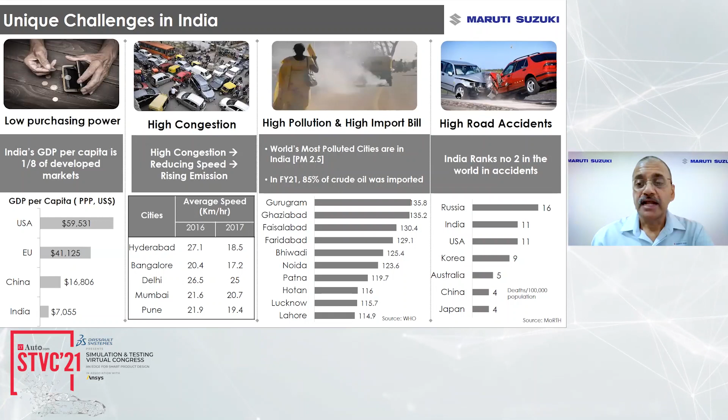This has led to reduced speeds, rising emissions. Pollution is still remaining high. The import bill is high because most of our crude oil is imported, and we continue to have high road accidents, and India is number 2 in the world.

But what is interesting and very different about India is that we have a very young population, and the Indian customer is evolving continuously. If you look at what they are looking for, there is an increased affinity towards modern technologies. They are always looking for intelligent features, whether it is on the smartphone or other gadgets or in passenger vehicles. They are always looking for enhanced safety. Safety has become very, very key for a buying decision. And of course, there is increased awareness in the current situation about health as well as hygiene.

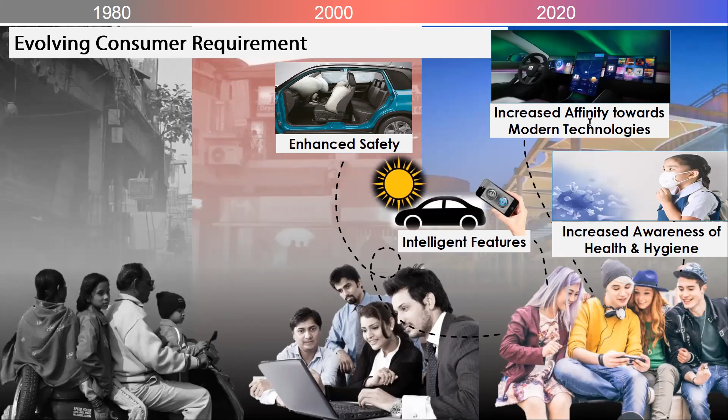The regulatory trends are also changing in a way that we are catching up with Europe. The emission norms of BS6 hit us in April 2020, and the auto industry moved in 3 years' time, in record time, to switch to BS6. The auto industry is working towards phase 2 in 2023, and CAFE phase 2, which is the current regulation. And of course, the future is WLTP and CAFE 3 going forward. These are some things we need to continuously work on.

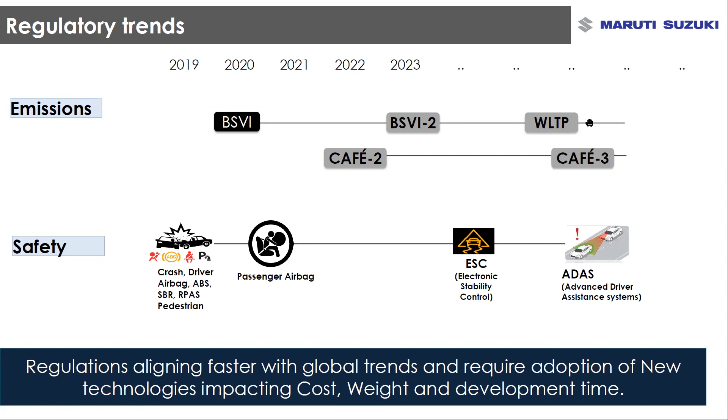Safety has become an important feature of the buy decision, and the regulation is at par with Europe today. So frontal offset impact, side impact, ABS being mandatory, passenger airbag has been made mandatory, and there are future regulations like ESC and advanced driver assistance systems being discussed, and we are globally aligning. This is forcing us to bring in new technologies, which is impacting cost and weight, and of course we need to do this development.

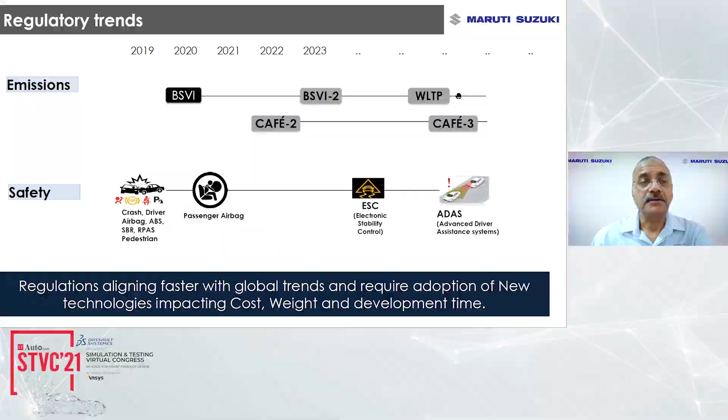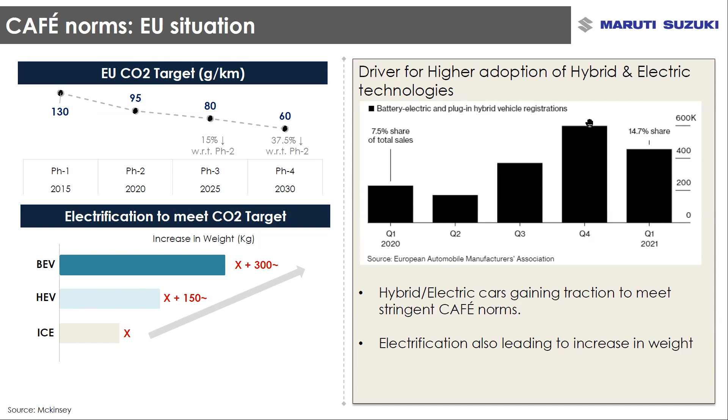The other thing from a fuel efficiency perspective: in Europe, in phase 2 in 2020, it is 95 grams per kilometer. In phase 3, 2025, it is going to be 80. And then in 2030, it's supposed to be 60 grams. What this is going to do is increase electrification in a way, and battery electric vehicles, hybrid vehicles are going to be introduced, which is going to increase the overall weight of the vehicle by anywhere from 150 to 300 kilograms, depending on the size of the vehicle.

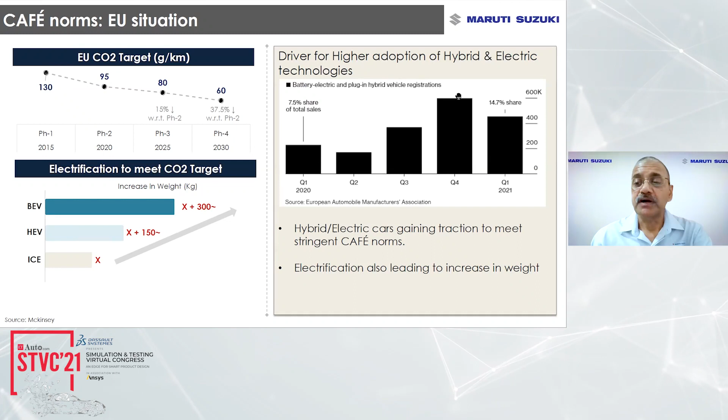These are required in order to meet the stringent CAFE norms. And as you can see, in 2021, the battery and plug-in hybrid technology penetration is slowly gaining traction in Europe.

The other thing customers are looking for is vehicle aesthetics and design. Exterior appeal is very important. Interior design is also evolving, and the infotainment system, display audio, and speedometer are getting integrated, with a lot of LED and mood lighting coming into the interiors.

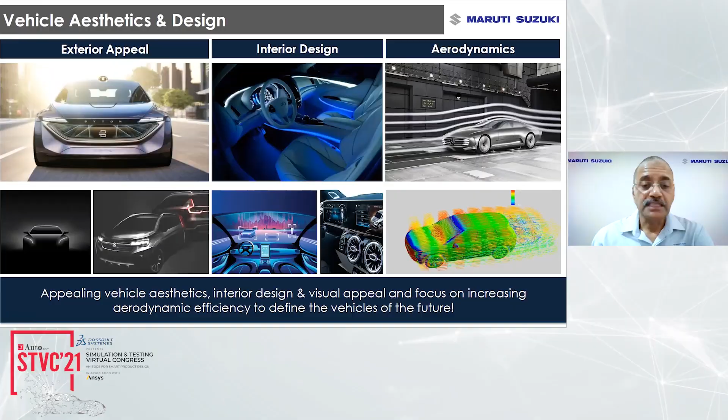The same is the case with exteriors. You have LED lamps, and vehicles are becoming more aerodynamic because we need better fuel efficiency, which is what the customer is looking for. This is one change we see going forward, and it is going to increase.

The other thing is that new technologies are being introduced in vehicles. We are all aware electrification is going to come in some time in India, but we need to start working towards those technologies, meaning battery technologies, battery management systems, motor technology, and power electronics.

These are going to bring in new design methods, advanced engineering, and new materials. Also, in the interior, advanced human-machine interface is going to come in, and in future, Europe and USA are talking about autonomous vehicles. India will be very different in this regard - we may not go there in the next decade, but surely in future we can see such activity.

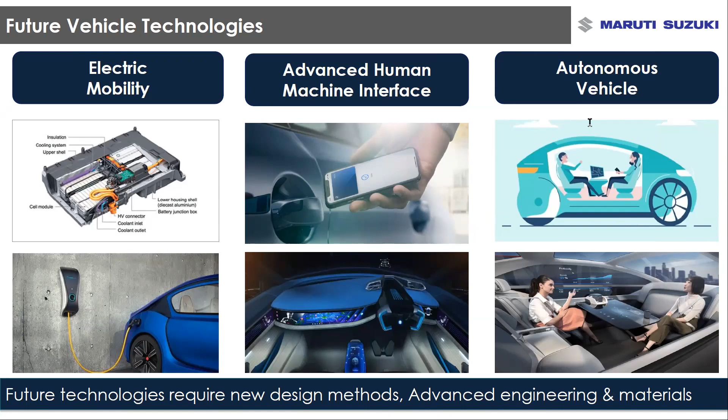So what is happening is there are challenges and opportunities. In short, consumerism is increasing, looking for appealing design, more comfort, and safety features. Competition is increasing, regulations are becoming more stringent, and technological leaps are required in terms of electrification and connected technologies going forward.

The challenge is the cost of vehicles is going up, the weight is going up, and the customer requirement is that time to market for such technologies is reducing, so customers are demanding this much faster. We need a holistic approach to address future vehicle requirements. The question is, how can it be achieved?

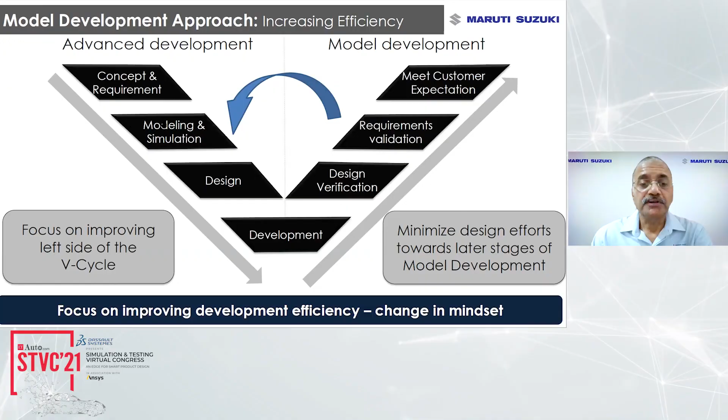How can we have use cases, models, and simulation improve that design, and have a kind of concurrent evaluation as well as design, to optimize the design so that when we go into physical prototyping, we get a good product going forward. That's the kind of change in mindset which is required.

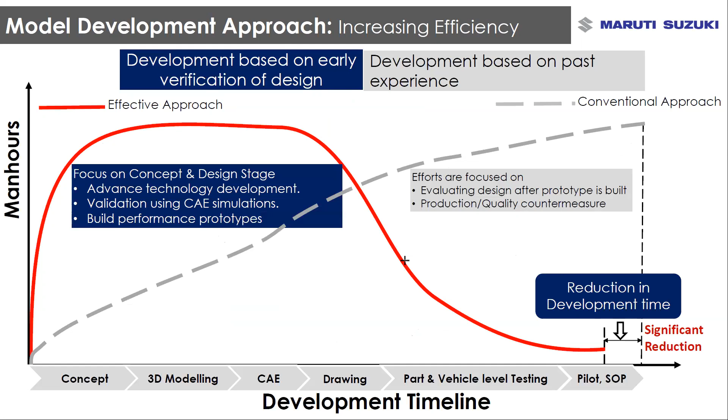And why do we need to do this? Typically, if you look at a model development cycle, it starts from concept, goes to 3D modeling, CAE, drawing, part and vehicle level testing, and then pilot and SOP. Traditionally, we try to make the design, make the part, and then do the validation, and then do the changes, which is a very costly affair.

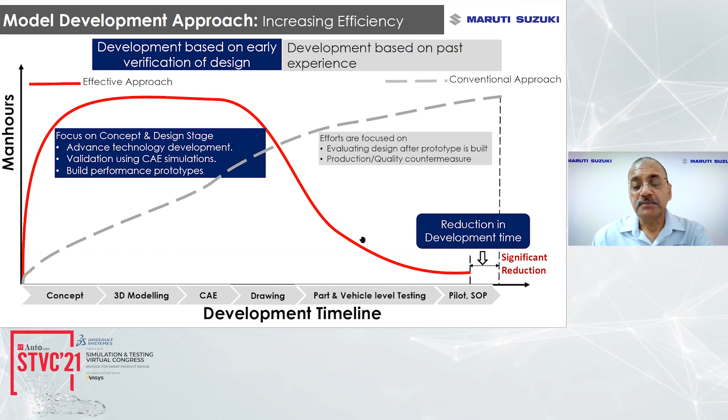So now all manufacturers are looking at trying to improve the design much before the drawing release. So what do we do? We need to ensure that at this stage, the red line which is there, this big hump which is there, we focus on the design and concept stage. We also bring in advanced technology development. We ensure that the technology is developed. We validate using CAE simulation, and we build performance prototypes virtually, so that when we get into the part and vehicle level testing, the effort required is minimized, and the changes required post this are minimized.

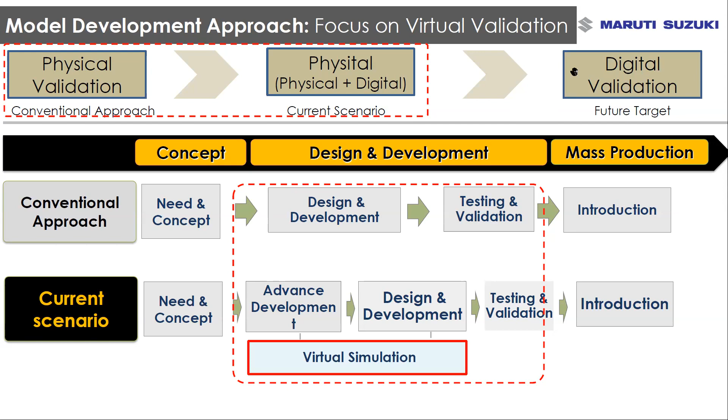As I said, the conventional approach has been physical validation. The current situation is that we are looking at physical as well as digital. But going forward, the future target is how can we make this laboratory come into the simulation? How can the actual road conditions, the actual lab conditions, the physical testing, be built into the simulation? So that's the change and that's the future target which we are all looking at.

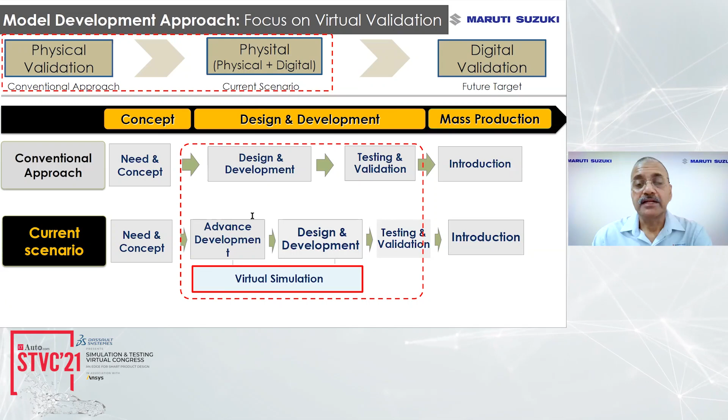So conventional approach: design development, testing validation, and introduction of products. How can we change from this to improve the virtual simulation and do the front loading so that we can make the digital model stronger and better correlated to the physical testing? If you look at all manufacturers, we have in a way matured our models as far as various simulations are concerned. We're not 100% as far as correlation is concerned, but we are quite there.

So from a design and crash simulation, there is a kind of correlation with the physical testing. Similarly, on aerodynamics, whatever the CFD analysis is throwing up and the wind tunnel testing, we are able to improve the model and come to a better simulation on the CFD. And from a reliability perspective, I think we need to work a little bit more because the use cases are many. How we can improve these models and build the reliability so that we can reduce our physical development, reduce our physical prototypes, and do this reliability analysis more in the labs or in CAE is something which we need to do.

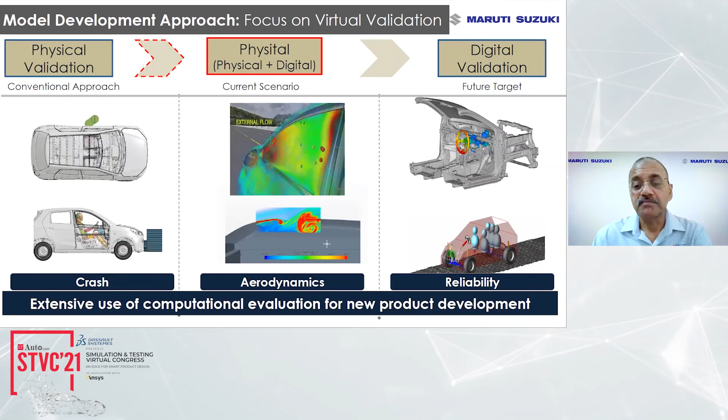And this computational evaluation for new product development is something which we are maturing. Today we are able to do the weight and structure optimization. We are able to do the durability assessment. But going forward, the simulation landscape is going to change. Why I say that is because we are going to get into xEV technologies, and the design and development requirement is very, very different, and we need to understand it better. We need to enrich our model-based design, and more technologies, AR, VR technologies, are also being built, which we all need to learn and improve.

And also from a testing and production variation analysis, we would like to make this more stringent. How can we make vehicles which have lesser variation as far as the tolerance is concerned? All of this can improve the durability, and can also help in risk mitigation and elimination of design prototypes going forward. I think that's what we are all looking for. How can we eliminate design prototypes going forward? Because it's a very expensive method of checking, and elimination of that is something which all manufacturers are looking at. And what would that require?

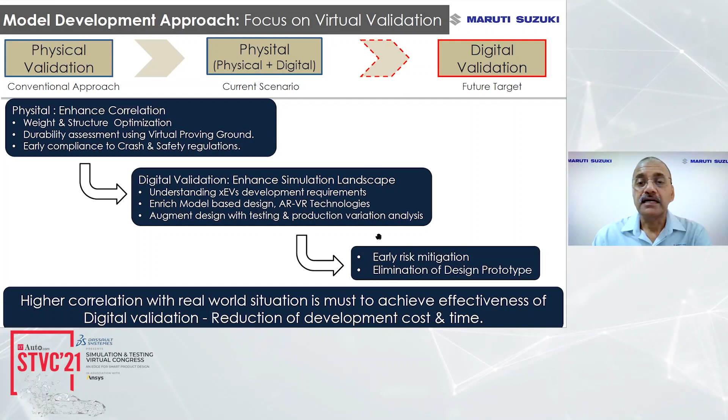We need to have a higher correlation with the real world situation. And in order to achieve this, we need to have better effectiveness of the design and digital validation, and this can result in a reduction in development cost as well as development time. Technology disruption is going to happen, and this is going to bring about a paradigm shift in the way we think and do product development going forward.

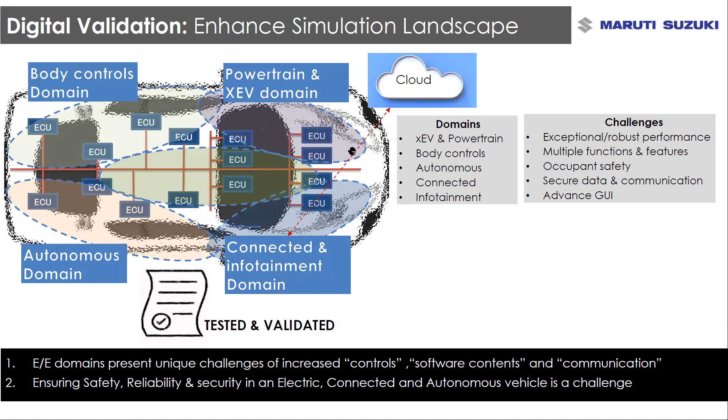And just as an example, the vehicle is going to have many electronic controllers. There's going to be the body control domain. There could be powertrain and xEV domain, the connected and infotainment domain, and there could also be advanced safety system ECUs. All of these need to talk to each other and work together. And they also would need to talk to the infrastructure, and there is also going to be some amount of connectivity from the infrastructure into the vehicle.

So it is going to be both ways. And so this is going to bring about a lot of challenges for the product development. So we need to have more robust performance. There will be multiple functions and use cases. We need to ensure that all these talk to each other. We need to have security of data communication and advanced graphic user interface.

So many challenges are going to be there, and all these require a different kind of mindset and change as far as the way in which we are going to evaluate the product, both physically as well as digitally. Because of the increased controls and software content, reliability becomes more challenging in such future technologies, and we need to learn this level of simulation going forward and build up use cases, build up the models, so that we are able to correlate with the physical and improve the math model going forward.

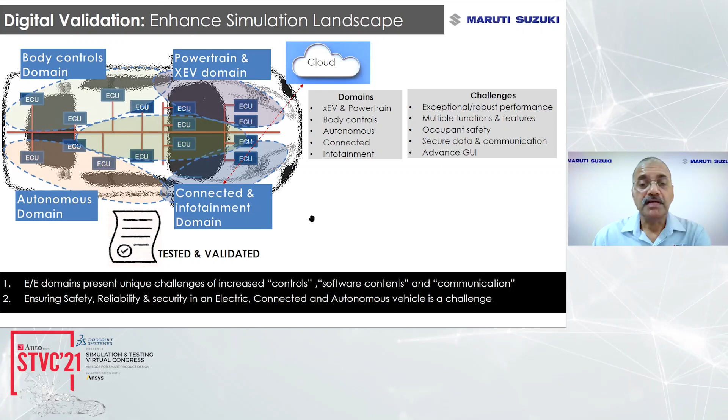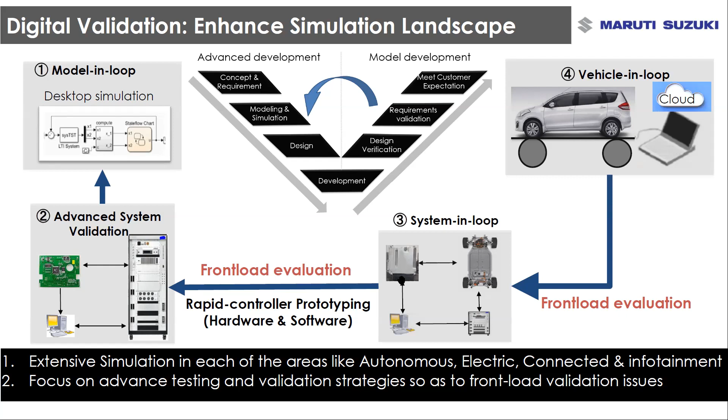Again, if you look at the V cycle, the V cycle becomes even more relevant in this case, because each of the technologies at the unit development level has to be ensured that it is robust and reliable. And also as a system, when we put it on the vehicle, they also become more reliable. So we need to front load the evaluation. So vehicle in loop and system in loop on the right hand side of the cycle, they need to front load this evaluation through advanced system validation and model in loop and desktop simulation.

This kind of simulation thinking we need to build into the V cycle going forward, so that these advanced technologies we are able to further front load into the vehicle development process. And especially when we look at electric, connected, infotainment and advanced driver assist systems, the methodology and the math models and the model in loop and the system validation which we need to build is going to be much more complex. And these strategies we need to develop going forward so that we can have a robust product development.

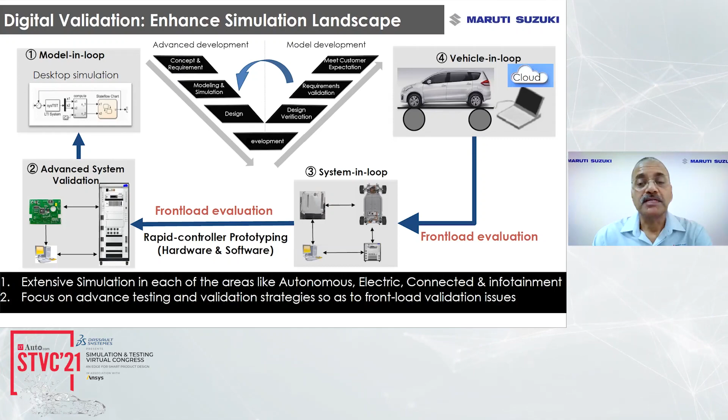And so when we actually do the physical validation in system in loop or vehicle in loop, we are able to ensure that whatever the designers had thought of from a concept point of view or from a design point of view, it actually meets the requirement of the customer. So that's something which we need to continuously work on.

Also, when we are looking at future technologies, hybrid technologies, electric vehicles, there will be a lot of work which we need to do in terms of safety and crashworthiness, because the platforms will be different. The battery pack is going to be built under the floor, which would require more robustness, from the side impact and rear impact as well as the frontal impact. And the battery safety cage has to be very robust. The motor cradle durability has to be very good.

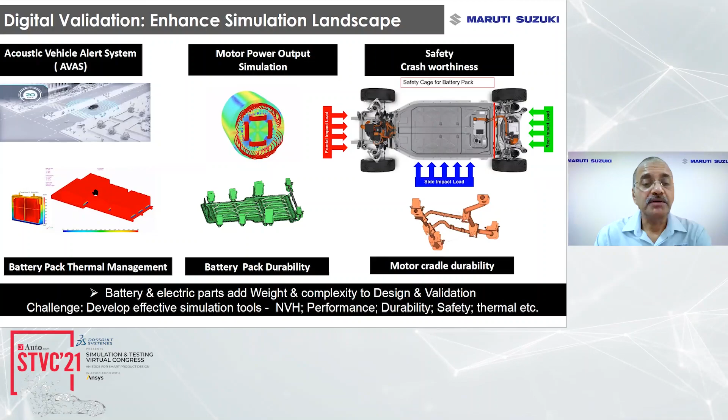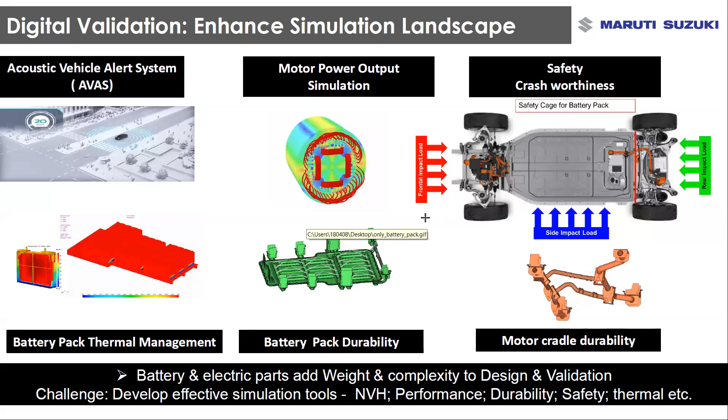Similarly, for the motor and the battery pack, those simulations we need to further develop and work on. And similarly, the battery pack and the thermal management system need to be made robust. So all of this is also building in a lot of challenge in terms of weight and complexity. So we need to have effective simulation tools on the NVH side: performance, durability, safety, and thermal, etc., in order to meet these future design validation requirements, because that's how the simulation landscape is going to change going forward.

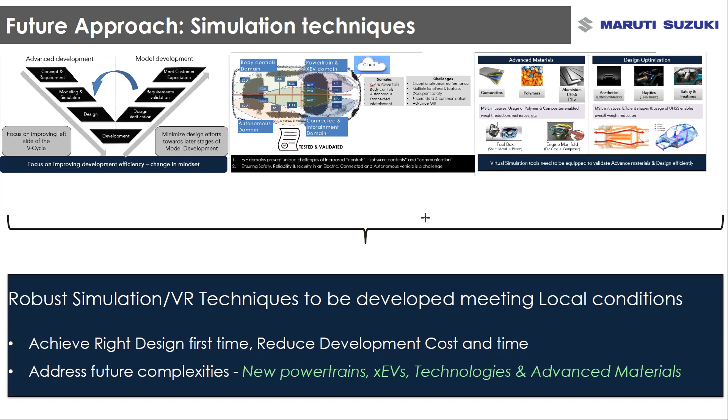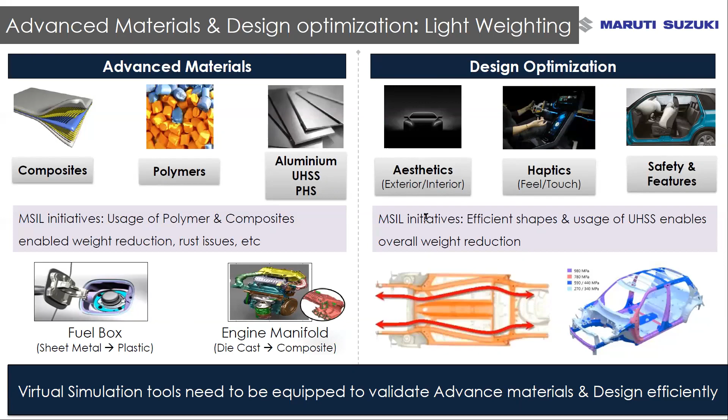For the future approach for simulation technologies, we need to also look at more robust simulations, use AR and VR techniques, so that fewer physical prototypes are there, and we are able to judge more of it digitally, and the engineers are able to visualize through these VR systems and design first time right, reduce the development cost as well as time, and address the future complexities of new powertrains, xEVs, technologies, and advanced materials. What this means is that we need to continue our work on advanced materials, design optimization, and lightweighting.

And today also, all engineers are given targets as far as weight is concerned, cost is concerned. That is not going to change. That is only going to become more challenging and more important. So engineers will have to look at newer materials, look at composites, look at polymers, look at ultra high tensile steel, maybe look at aluminum, and do the change as far as materials is concerned, material substitution to reduce the weight and improve the performance.

So some of the things which are happening, in case of Maruti, is the fuel box is made from sheet metal to plastic. The manifolds have changed from die casting to composite. So these are things which we are working on already. Also on the platform technologies or a HEARTECT platform, we are using more high tensile steel, making the platform weight reduce. Also, from the previous generation to the next generation of vehicles, there is a substantial weight reduction which we are targeting going forward.

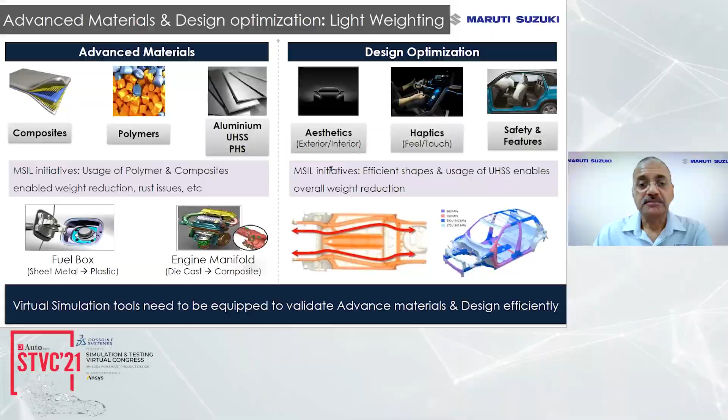And we are also trying to look at improving the aesthetics, reducing the CD or the road loads, improving the touch and feel in the interiors, and improve the safety and features. All of this requires that we need to have advanced materials, and we need to make the design overall more robust and efficient. So the future approach as far as simulation requirements is concerned is we need to develop new materials, and we need to develop more new modeling tools, develop the material characteristics, build it into the model so that we are able to predict.

Second is we need to upgrade our simulation tools so that we can correlate the local load cases or the use cases. Three, we need to look at simulation methodologies to validate performance for future technologies like xEV technologies or infotainment and future safety requirements. We need to have a good computational lab and hardware system so that we are able to get a good correlation between the computation and the actual physical testing.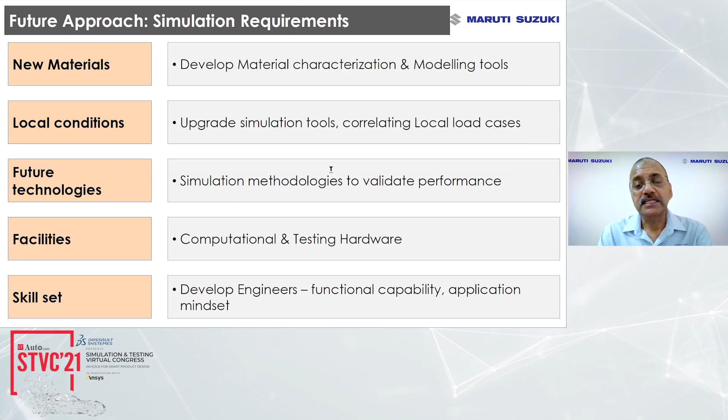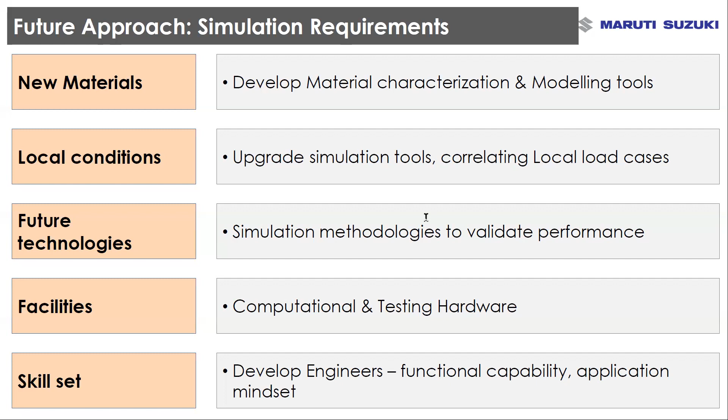And lastly, and the most important is, how do we develop engineers who have the mindset to develop capability to check for functional requirements and also look at front loading and the possible use cases, and see at the design stage how can you front load these technologies, these requirements into the design and the validation requirement, so that the physical testing gives better results and is also reduced. So our attempt is to get better results as envisaged in the design at the time of physical testing, and ultimately to reduce the physical testing and go more towards the simulation technologies going forward. I think that's the way forward as far as the industry is concerned.

In order to do this, one other thing which we require is that the OEMs need to work in a collaborative atmosphere. It is not one area which can work. We need to work as OEMs with material suppliers to look at new materials and new technologies for manufacturing also. We need to work with simulation and testing agencies to work on such new simulation tools. And we also need to work with the software developers to make the engineering simulation more robust, so that we can bring the road and the labs into the CAE process. And this collaborative effort is required to meet the future requirement.

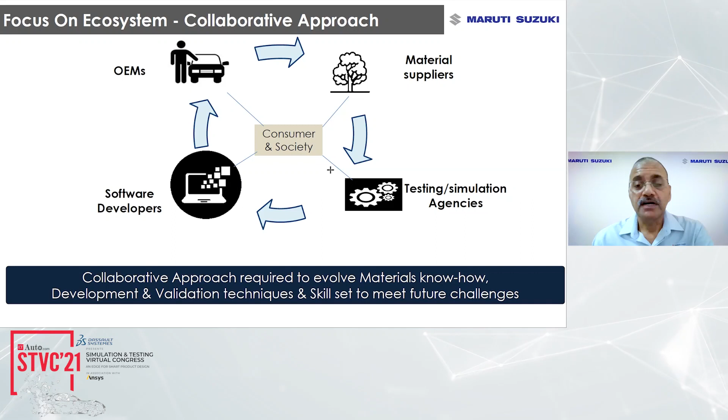And of course, all of this requires a skill set. The engineers need to develop this kind of a skill set and look at more innovation going forward, so that we can improve our overall process and make it robust. So I think very importantly, as India, we need to look at how we can do India-specific research and development, develop indigenous technology and manufacturing, and of course, we need to scale up whatever we are doing, so that we can deliver products as required by the customer.

So I think there is a lot of opportunity, and I'm sure the conference is going to have a lot of discussion around the simulation and technology, and how we are going to develop new materials, how we are going to look at new methods, how we are looking at newer ways of improving our development process, make it more robust and make it relevant and provide more value to the customer.